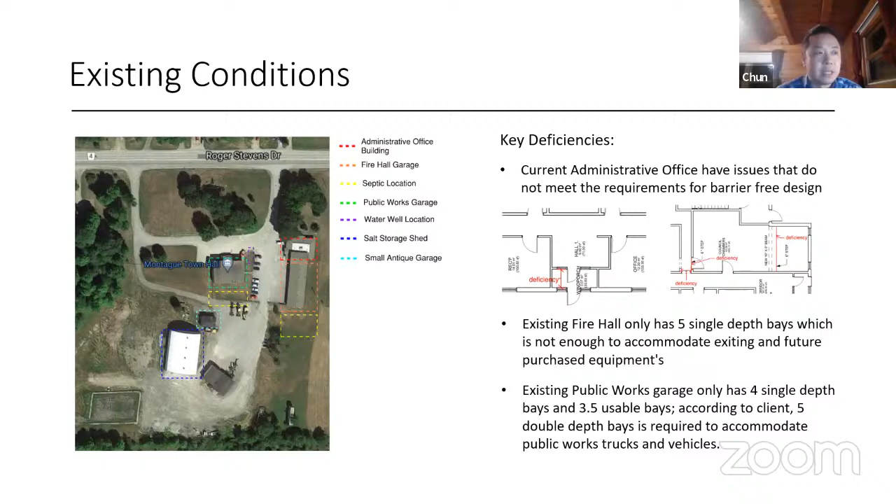Other than accessibility, the major task is programming for the future new building. We consulted with the township manager, Andrew, Stephen, and fire chief Emil. After an on-site review of the existing building and interviews with them, we learned what they need, their working conditions, their everyday life, and the number of staff currently working in the facility and in this office.

We picture the future building meeting their current use while also considering future expansion. So in our programming stage, we listed all the existing rooms and also the future expected spaces based on the actual need. And you can see that for each building we ended up with some increase in square footage. This is based on some of the existing rooms.

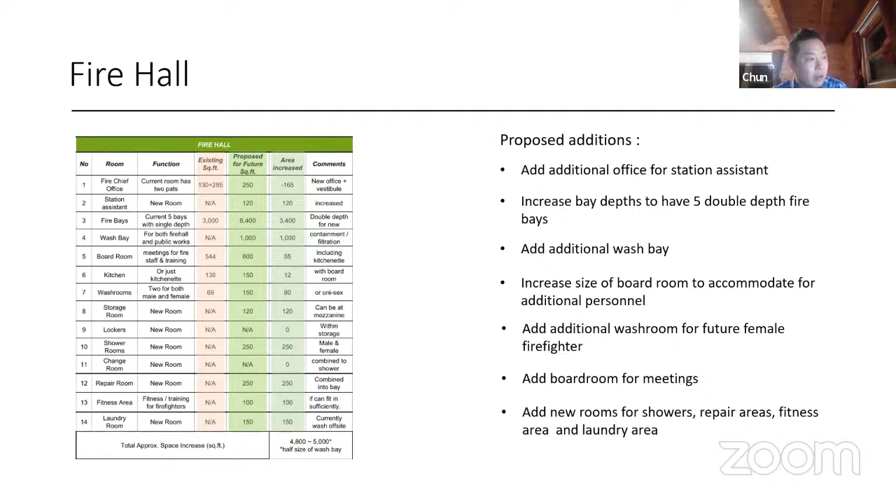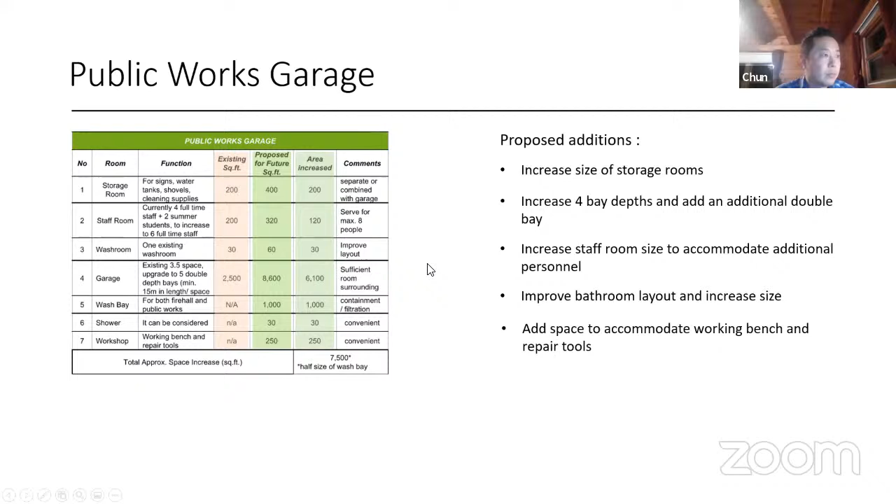For the public garage, we followed a similar practice, considering the existing equipment and trucks and also future increases. We made the overall square footage first, and then based on all these room spaces and square footage, we started our concept design, which ended up as the concept plan you can see later.

This one is the future admin office, which occupies the existing admin office plus the existing fire hall space. We also left the second level of the existing office, right now used as the fire hall board room, for future development or storage space, because the nature of the admin office requires it to be fully accessible and barrier-free.

On the ground level, we have enough space for future needs, and you can see there are also 2 fire truck bays on the south end of the building we left for future development. This means the existing and near-future use, based on the information the staff provided us, is already met using the rest of the space.

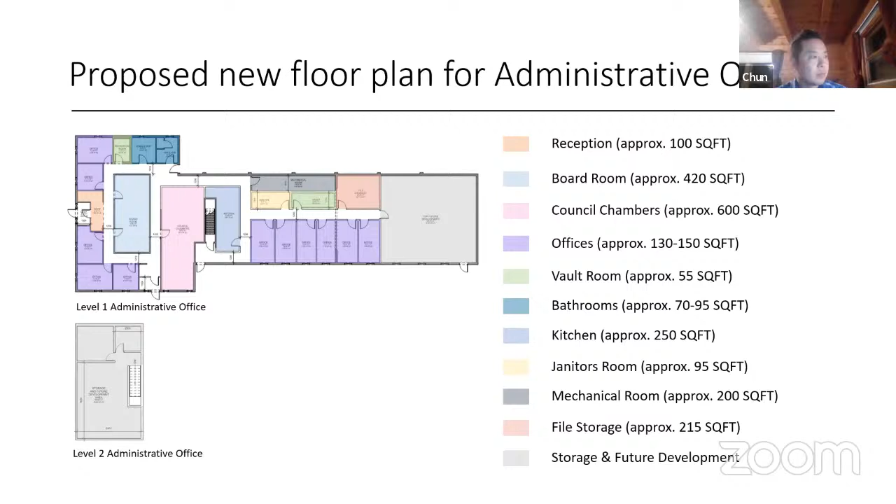For the proposed public garage and fire hall, we integrated them together into one building. That's also considering the nature of these 2 buildings. Lots of servicing space can be shared, like a shower and changing room, for example.

For the parking spots, we exactly followed the actual need for the existing truck number, and also the potential to buy more equipment in the future. So we followed the data directed by the public works manager, and we designed this section of the building to serve the public garage.

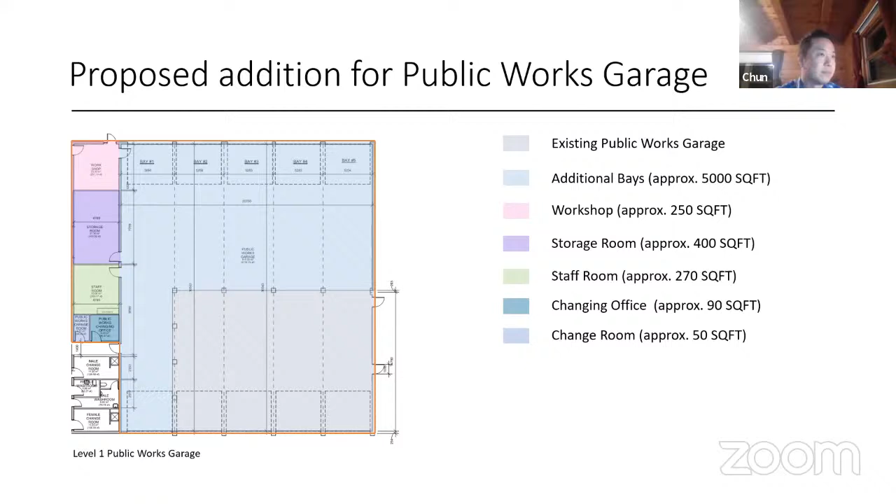Same thing for the fire hall, and you can see there is a certain amount of the space we actually can share with both sides, and there is an entry and the corridor connecting both sides to share certain of the functional space.

The 5 double-depth parking bays also consider the existing trucks, and in the near future you may potentially buy some more trucks, and more of the equipment can be stored and parked inside the garage. And at the west end of the building, there is a washing bay that can be shared by both the fire hall and the public garage to wash the trucks properly.

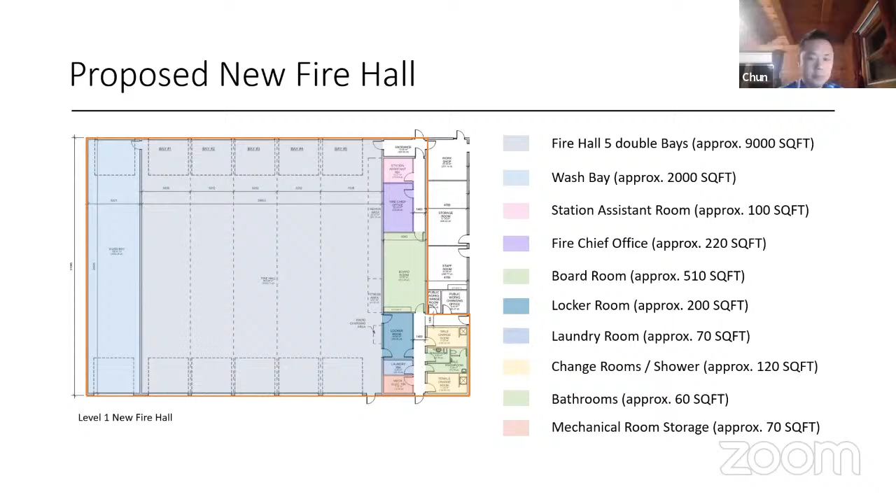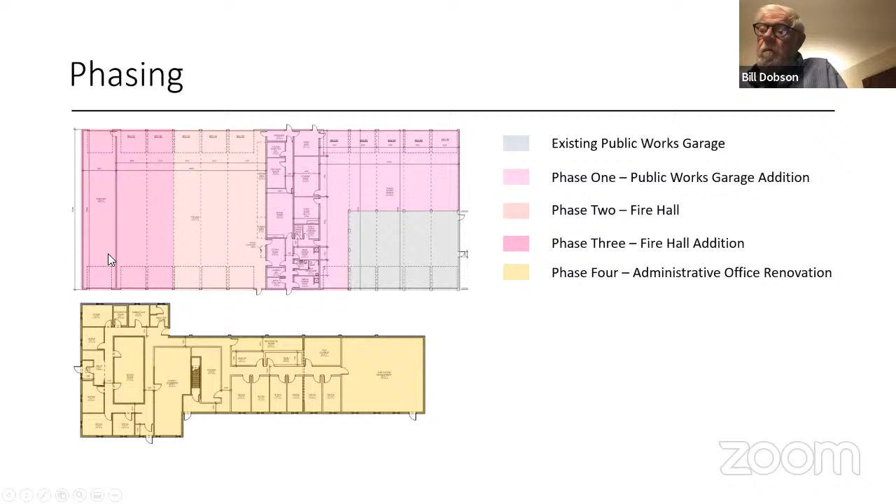Yeah, and considering the size of the building, we sort of threw out the idea, especially for the larger building, that this can be phased during the construction. That really depends on the funding, right? And also considering the timing of the construction. The good thing is during the construction of this new building, the existing admin office and existing fire hall can still be used, right? And even the existing public garage can still be used if we phase this construction properly.

And also depending on the funds, we can, for example, at the very west end, the parking, the washing bay, and also the additional parking bay, if based on the actual funding, we can reduce the number of bays, right? To provide the flexibility either for the final building, or provide the flexibility for the actual construction timing and the phase.

And after the new building is finalized and the new fire hall is put into use, the existing admin office and fire hall can be converted to the future admin office. That means if we plan well, either for the construction phase or for the timing and the funding, our plan leaves the township full flexibility to eventually make a decision based on the funding and the timing. And that can be further discussed.

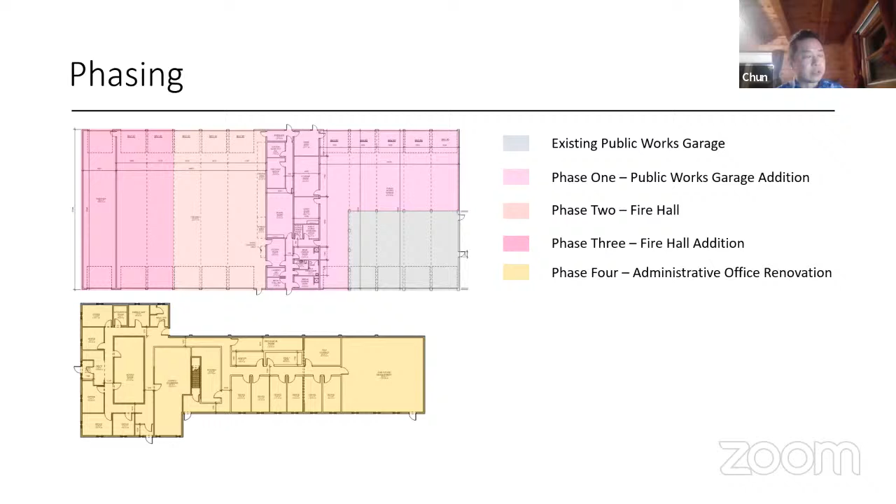Next I will pass to Devin to give a short brief on the energy modeling. I know the township is quite eager, especially for the existing admin office conversion, to try to get a 30% reduction in energy consumption for the future new renovation.

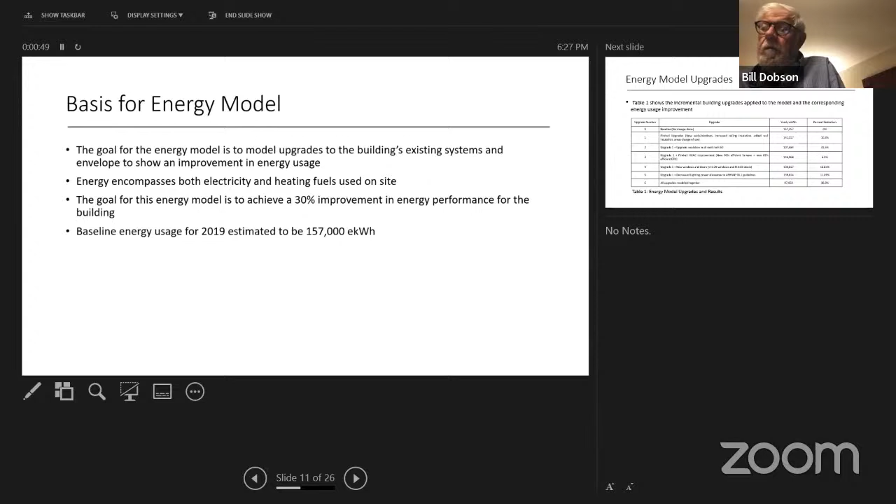Okay, do you want me to share my screen? Okay, sure, you can. You want to share from your stand? Yeah, I'm just getting to it here. We can see it now, Devin? Okay. You can see the full presentation screen. Okay. Yeah.

Thank you for having us tonight. My name's Devin Lake. I'm with Greer Galloway Consulting Engineers in Kingston. I'm the project manager for the engineering on this project, and I'm a mechanical engineer by trade. So I'm going to speak to all the work we did, which was energy modeling, mechanical, electrical, and structural recommendations

and design recommendations. So for energy modeling, we were tasked with trying to find ways to improve energy efficiency of the existing building after the renovations by 30% compared to its energy use today. We were provided utilities: electrical, propane, and oil. All three are used at the current facility. And we used those numbers to come up with baseline energy use based on known construction and some assumptions: insulation values, window values, and the existing HVAC equipment efficiencies.

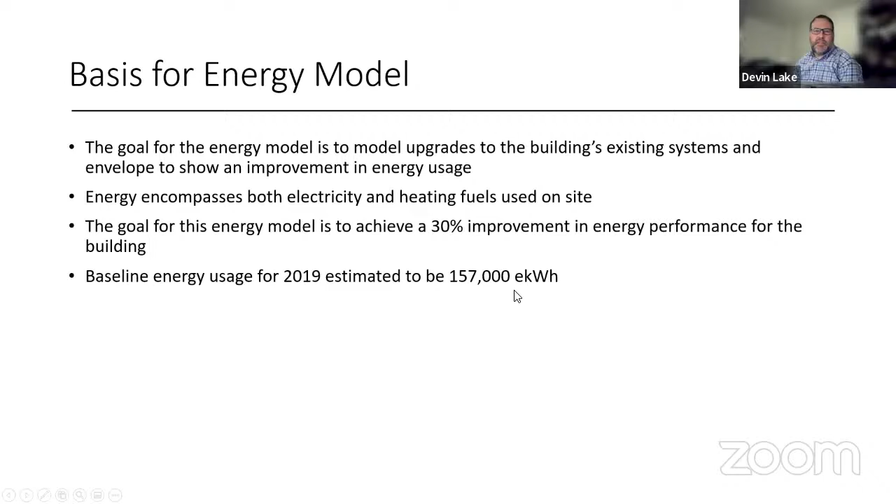So we started with the baseline energy usage in 2019 of 157,000 equivalent kilowatt hours. That's the combination; we just convert propane and oil to kilowatt hours so that we can make a baseline comparison. And we didn't look at all the possible energy efficiency upgrades that the building could receive. We had no issue getting to 30%. We could certainly explore more, and I will discuss that as we go through the HVAC options.

So you'll see in the first row of the table that upgrade 0 is nothing. That's the baseline, where we're at today, as of the 2019 numbers. The first upgrade is simply what Sean has already talked about in terms of new walls, infilling existing bay doors in what is now the fire hall, increasing some ceiling insulation, increasing some wall insulation. Those improvements alone represent a 10.3% reduction in energy.

The second upgrade we looked at was just increasing the insulation in all roofs to R60. They're truss roof systems, so there's lots of attic space there to add blow-in cellulose insulation. So you can see right here we're getting 31.5%. So between the two minor changes to the building envelope, we're seeing over the 30% that we were looking for. So it points to how old the building is, and how limited the insulation is compared to what we do today.

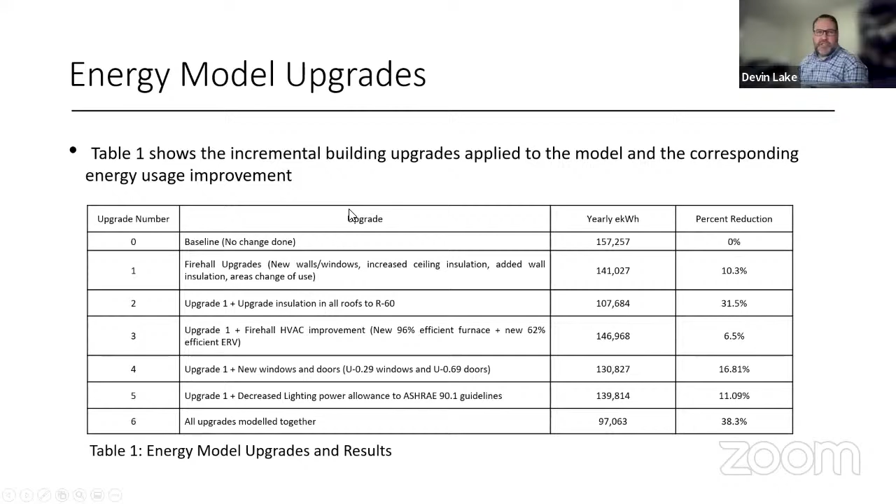And then in terms of the new building, we were just asked to comply with the current energy standards. So there was no energy model done to demonstrate what that would be. It would be just to building code. And so here's just a chart of how the energy usage is over the season. Obviously we're a heating dominated climate, so you see a higher energy usage in the heating time of year, and then it decreases in the summer months. The insulation values make the biggest improvements on the extremes during the colder weather.

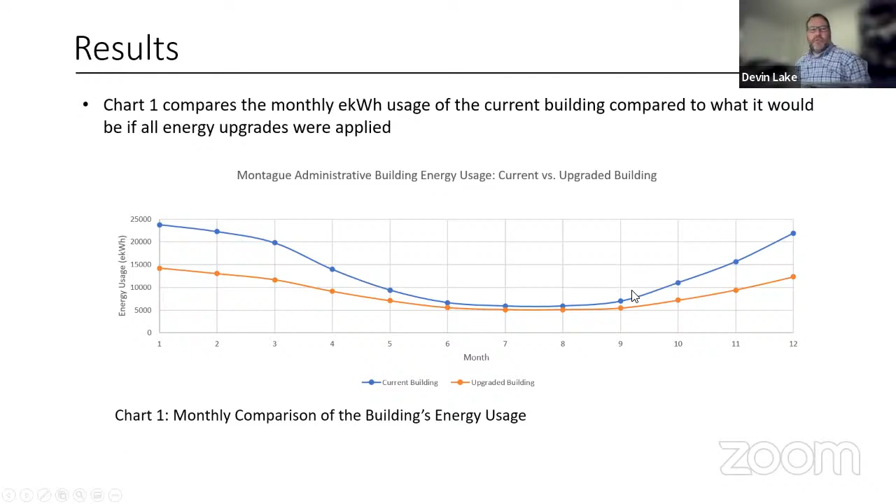Electrically, our electrical engineer reviewed the site. We'll start with some existing deficiencies that will have to be corrected. On the incoming service, there was a missing splice cap on the line, which could cause shorts. Panel A2, this is the existing building. Panel A2 is protected by a 200 amp breaker, but the panel itself is only rated for 125 amps. The next slide talks about recommendations.

The generator manual transfer switch has been damaged by a fire truck. So it's possible that other electrical equipment could be damaged in the same manner. So those things would need to be rectified. Electrical bonding for the main distribution relies on metallic conduits and enclosures. This is code compliant, but not best practice. So I'm going to switch to the next slide and stay on the administrative business building.

So it's required to fix that splice because it is a safety issue. For the panel that is only 125 amp rated, but protected by a 200 amp circuit, it needs to either have a new 125 amp overcurrent protection device to protect it, or you could alternatively switch it out with a new 200 amp panel.

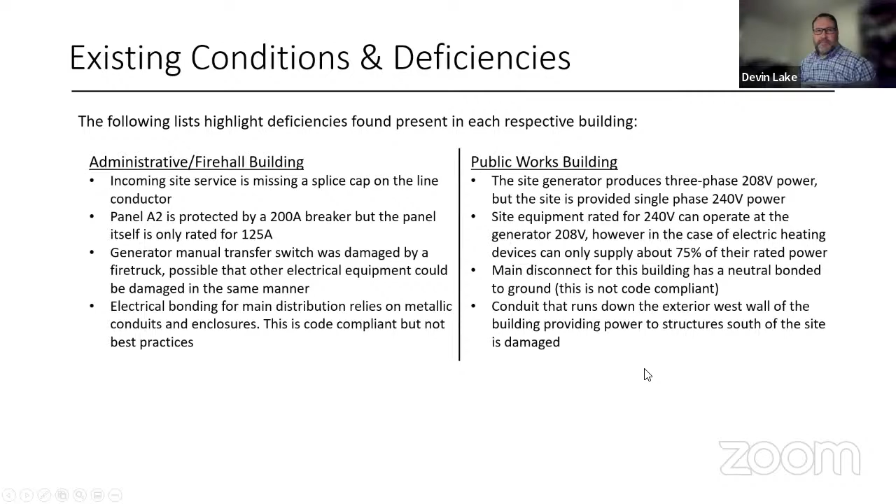The main disconnect for this building has a neutral bonded to ground. This is not code compliant. And the conduit that runs down the exterior west wall of the building, providing power to structures south of the site, has been damaged. So requirements to fix some of these deficiencies are, again, perform a load calculation of the entire site to determine if a site service increase is necessary. This would also be to support the construction of the new Public Works and Fire Hall building.

Upgrade the current emergency generator with a new propane one paired with an automatic transfer switch. So right now it's a manual transfer switch, so somebody has to be there at a power outage and go flip the switch. We're recommending an automatic one. Recommending to upgrade the generator because of the one issue I already mentioned, that it produces three-phase and only one phase is being used at 208 volts rather than 240 volts that the building uses and what your current service is.

And also the age of the generator is quite old. And it's also diesel, so propane is a little bit cleaner fuel than the diesel. Not that it should be running very often to have much of an effect on your greenhouse gas emission.

The third point is to ensure that the building can operate on current electrical infrastructure until the new mechanical electrical room is constructed. This relates to the phased construction. The new electrical room is located in another phase than the first phase. So that's in phase 2, I believe. So that will be something to consider. It is suggested that any equipment involved with the site service entrance not be relocated. Sorry, I went back a line.

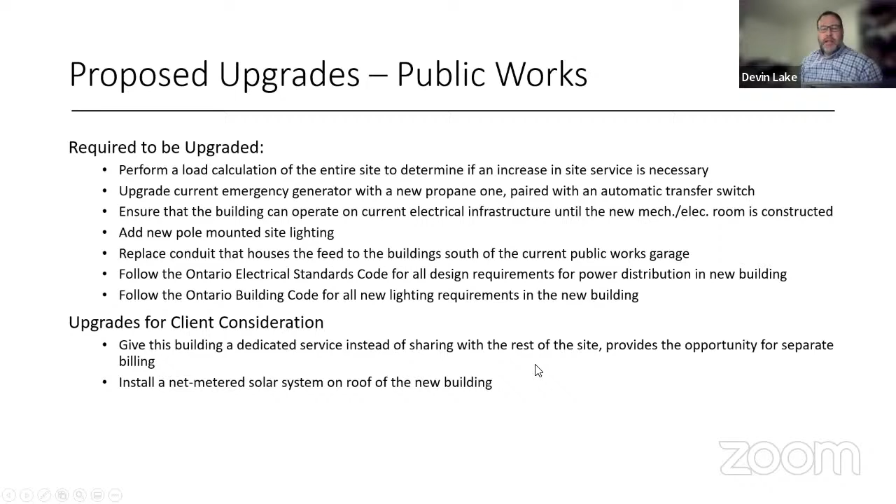Upgrades for the client to consider: give this building its own dedicated service, instead of sharing with the rest of the site. Right now, the service comes into the one building and is shared among the two and other outbuildings. So this would provide the opportunity to separate billing. And you could also consider installing a net metered solar system on the roof of the new building to meet some of your energy efficiency goals.

Any questions on the electrical before I move on to the mechanical? If someone wants to ask a question, they'll have to just speak up, because I can't see the screen. I can't see everyone. Unless you want to just flip back to the screen there so we can see everyone. But do I hear any questions? Okay, I think you can go on then, Devin, to the mechanical.

Okay. So mechanical, laid out the same way. We're going to talk about the deficiencies in the administrative fire hall building. The existing HRV's fresh air intake was found to be completely blocked. So obviously this creates, in the age of COVID, a concern that you're not getting any fresh air into the building and not getting ventilation to help the air exchanges and indoor air quality.

The fire hall furnace has been damaged and is not operating. The fire hall furnace was found to be outdated and not high efficiency. The building suffers from low water pressure during heavy times of use. And then the public works building, exhaust ventilation to control vehicle emissions was not operating. It was a safety issue. People breathing in the carbon monoxide and the NOx emissions and other VOCs.

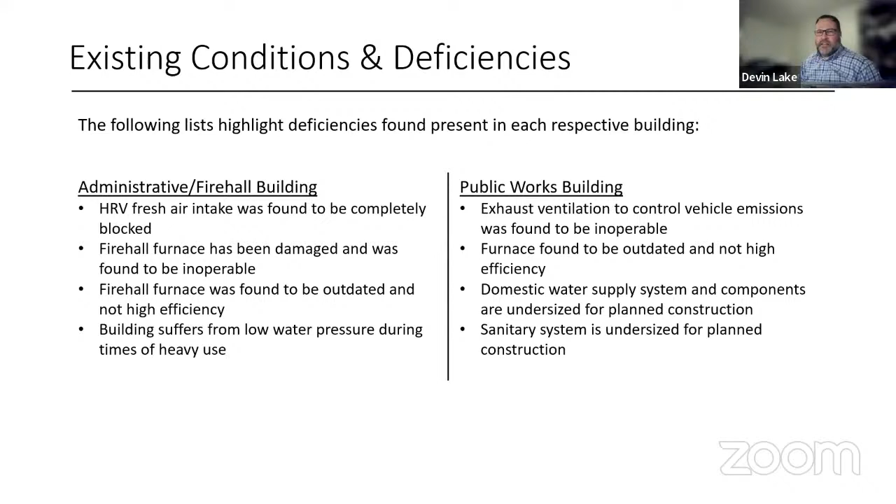So the furnace was found to be outdated and not high efficiency. The domestic water supply system and components are undersized for planned construction, and the sanitary system is undersized for planned construction. So in terms of the existing building and the renovations that IBI has presented, we've looked at the building and thought it makes sense to kind of consider it in 3 zones.

Zone 1 is the administrative area, less the council chambers and a meeting room and the upstairs. We separated out Zone 2, those specific areas, because their current systems aren't necessarily adequate for the increased occupant load that those spaces will have. So you need more ventilation air than what can be provided now. That's one reason. The second reason is that they can have very different loads than the rest of the building. Council chambers can be heavily loaded at times and then largely unoccupied. Same with meeting rooms. They're often heavily occupied and then not occupied. So it's nice for them to have their own system.

And so for Zone 1, the administrative area, the recommendation is not to change anything other than some minor duct modifications for any layout changes. That recommendation is because the equipment is currently of a higher efficiency. It's not that old, so it's not really scheduled for replacement. And the other options we looked at, such as either new systems or relocating it into one of the new mechanical rooms, would require extensive duct modifications, whereas by retaining it, you can essentially keep everything. So it's a low capital cost with not much upside to moving the equipment other than freeing up some space where it is now.

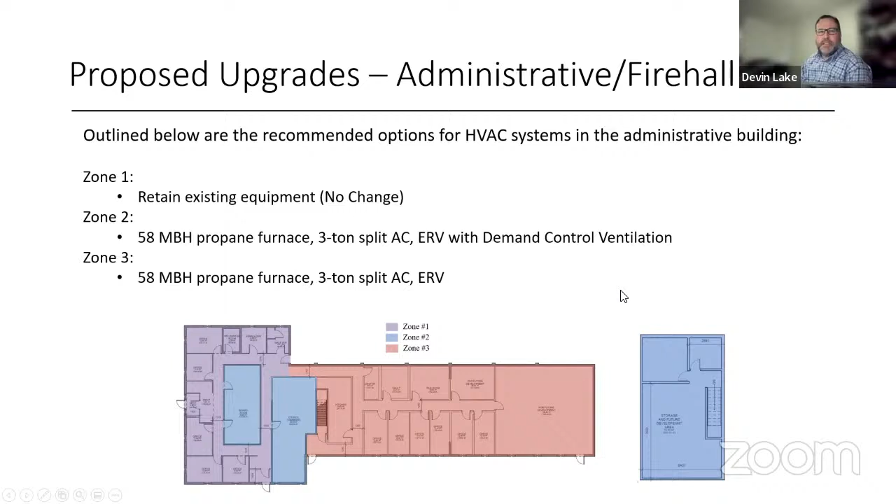For the public works garage, again, we've separated into zones both to reflect different uses, but also to reflect the phasing that Chun presented. Starting in zone 1, starting on the left is a vehicle wash bay. And then zone 2 is, is that the public works? No, that's the fire hall bays.

So in general, and then I will also talk at the same time about zone 5, which is the vehicle bays. So in general, vehicle bays have doors opening and closing frequently, which means any cooled air or heated air escapes every time the door is open. So it's expensive and energy intensive to heat the air. So systems better suited to that use are radiant systems, which is a surface to surface type heat. You don't necessarily heat the air, you're heating the surfaces.

So for those areas, zones 1, 2, and 5, we reviewed or analyzed in-floor radiant heat and propane radiant tube heaters. And our recommendation for those 3 zones, similar uses, are all propane radiant tube heaters. This is, they both have their pros and cons.

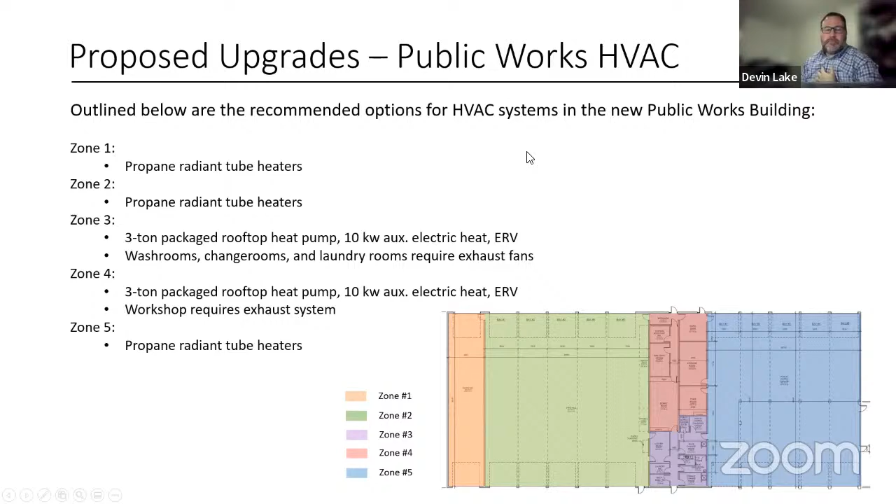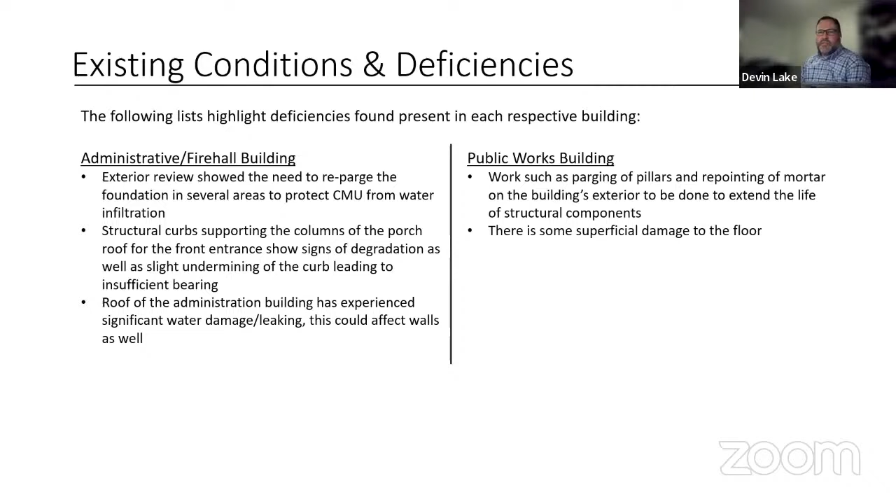So the proposed upgrades with the renovation of the administration and fire hall is to reparge the walls and foundation where required, address porch columns by introducing non-shrink grout between the curbs until such a time that they can be removed and replaced with new cast-in-place curbs. Follow through with the already planned roof replacement of the administrative building, and retain a structural engineer for any new planned windows or doors in the existing CMU walls.

The construction of the administrative and fire hall building: in the fire hall, the exterior walls are concrete block walls, whereas as you move into the administrative area, they are lumber walls.

So proposed upgrades for the public works. The proposed new fire hall and public works garage building can be designed with conventional or pre-engineered steel framing for the superstructure, and conventional pad and pier foundation would be the foundation. Of course, this is all pending a geotechnical investigation once the project progresses to design level.

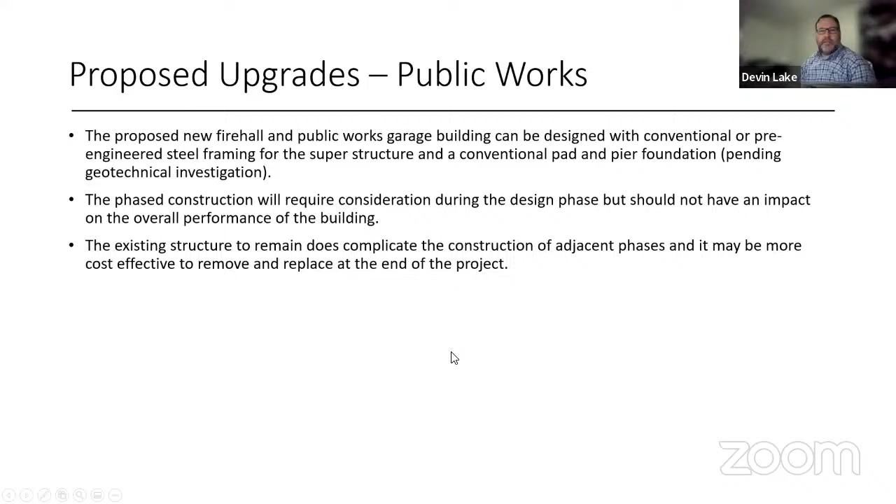And then cost, Chun, do you want to jump back in on the cost? Sure. I will talk a little bit about the cost. After a conversation with the township manager, we went back to the cost consultant to refine the estimate a little bit more, because the construction will not take place immediately, considering the timing, maybe in the next 1 or 2 years to gradually do this job. So considering all these factors, the cost consultant bumped up the overall numbers a little bit, to give a better vision of the overall construction cost.

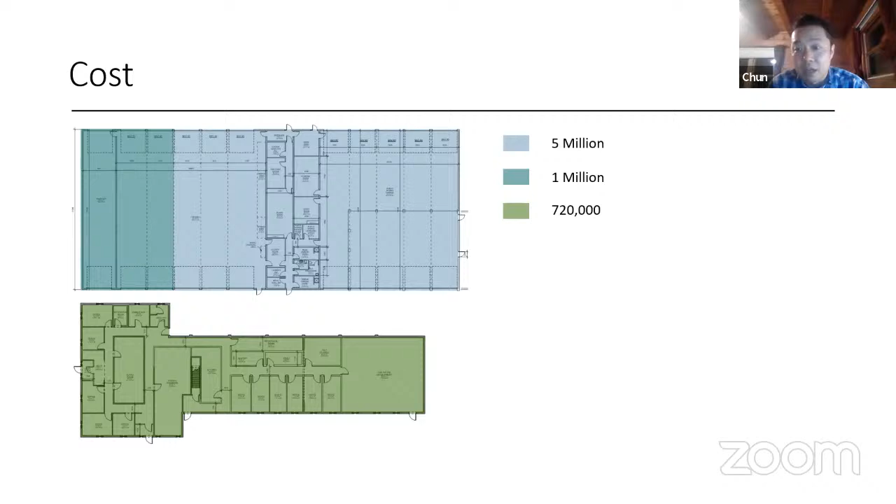So at this time, if you still upgrade from an 80% efficiency furnace to a 90% efficiency furnace, you won't see that much reduction of energy consumption anymore, because the house condition improved a lot and your furnace won't run that much. Compared to before, at 20 hours, no matter which furnace you use, it needs to run 20 hours to provide heat for your room, and if you increase from 80% to 90% efficiency, you will see an immediate reduction of energy consumption. But for your very well insulated house, you won't see that much anymore.

So that's why every strategy being combined won't add up. You will see about 38%. But also, I want to add this.

Some of the improvement, or say changes, is inevitable, right? Like we pointed out, some doors are too narrow, not accessible, right? You will need to change them anyway, so you can't avoid changing them. So once you change them, of course, improve the U value and put a better performance door there, right?

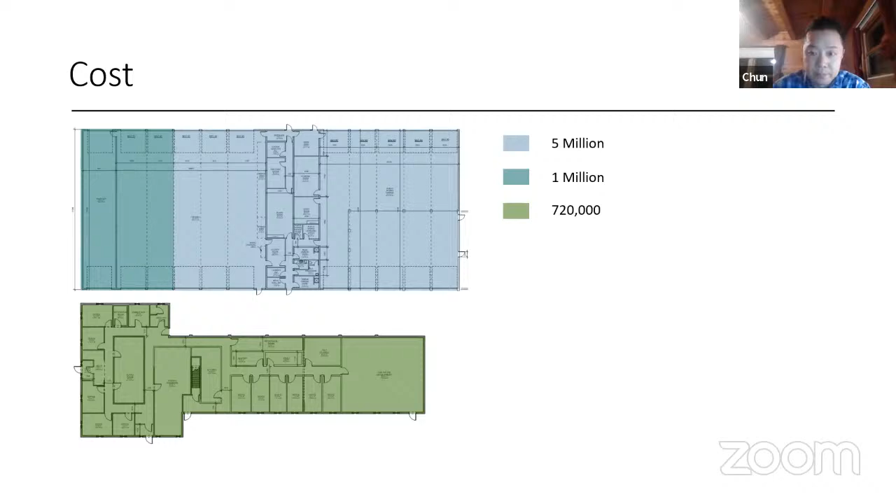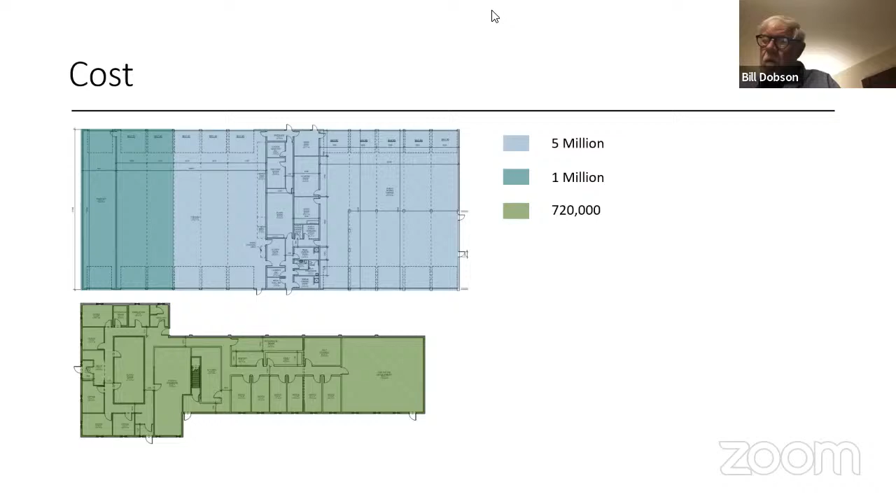So I think, Chun, if we can maybe go back to our other screen without the report, and then I'm going to open it up for some questions. Thank you. Okay, first off is Claus, and then Ian.

Thank you, Reeve and Chun and Devin. Thanks very much for your report. It's amazing reading, I can tell you that. It's very interesting. I just have a quick question, and then I'll let someone else ask because I do have several. Chun, I'm just wondering, the council chambers, you're only increasing it by 50 square feet. Is there a particular reason why, or is it you can't do more than 50?

Yeah, we definitely can increase more, but all these numbers are just based on the requirements after interviewing the township staff. That's the minimum increase, right? To meet their current goal. So in the end, with the future conversion of the fire hall, there's still additional space that can be used, right? So if we want to increase some of the functional space sizes, there is still a possibility.

But what I'm saying is, that chart was after consulting with the township manager and the staff; we got those numbers. So based on those numbers, we increase. That's just the minimum we have to do to meet our township requirement, right? And of course, if we have the opportunity or the extra space, definitely we can increase more. Okay, thank you. Ian?

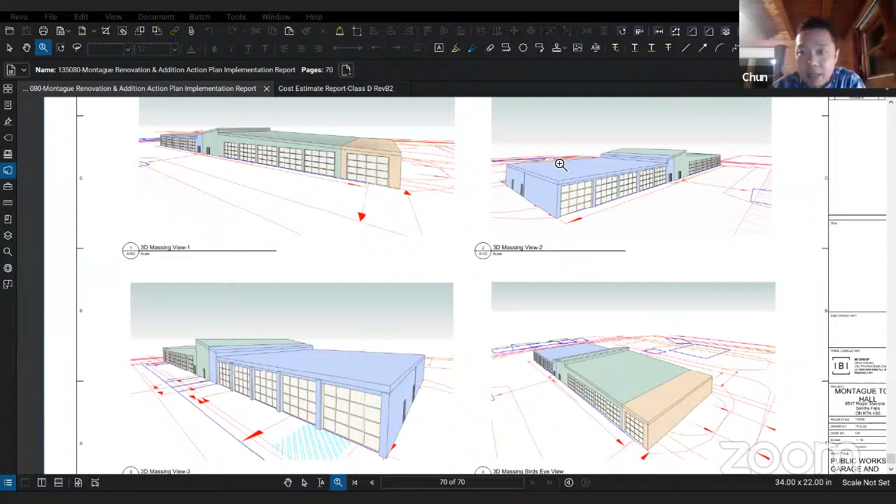Yeah, that's just currently a preliminary concept. We thought that is the most cost efficient solution, right? And you see the concept from our 3-dimension view, I can share that. In the middle of the building, we did design a higher, like a 2-story level, right? And that part is not flat, and we can anticipate that part to be extended to use a second level even, for this middle part.

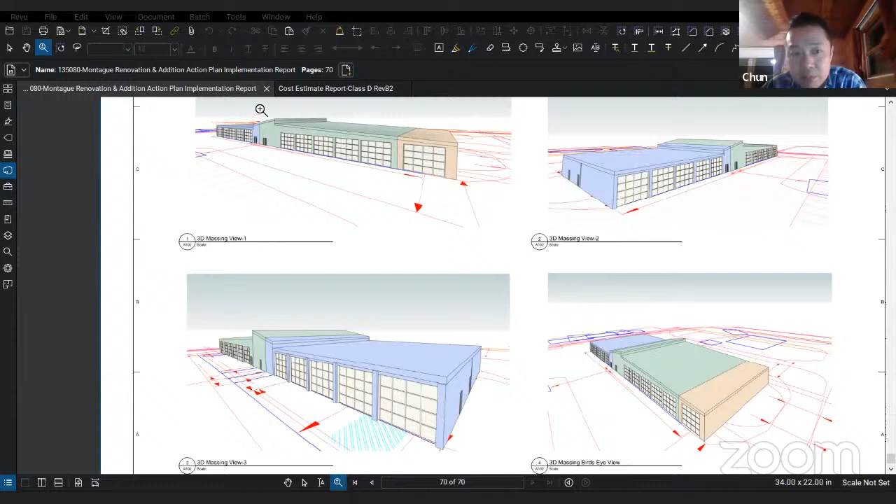We on purpose designed it a little bit higher. One thing is to break the long stripe of this boring building and make it more fun. And also, after the interview and conversation with the township staff and the manager, we want to leave the opportunity to add the second level in the future. After certain years, with expansion of the staff and more equipment, at least the second level can be used either as storage or a future small office. Yeah.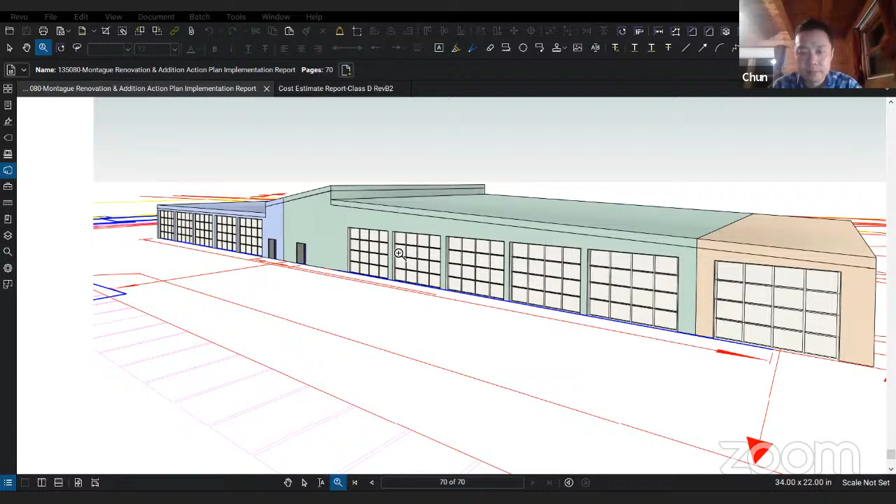Okay. Very good. It was interesting to see that. I guess there's more of the report that we could see as well, right? Yeah. Okay. Thank you. And once again, guys, thanks very much. This is a great beginning. So, yeah. Okay, thanks to everyone, Ben.

And I really think overall now that we've seen this report, as one of the many next steps, council has to continue putting their heads together and making sure which direction we really do want to go, because it's been pointed out tonight and through this report that there's quite a few things wrong with many parts of the buildings. So we have to continue thinking about that, whether we're renovating or going brand new.

I know we flip-flopped back and forth. We've spent a lot of time and energy and thought on that, but I think we still have to continue doing that. And I think it would be nice to see an overall cost of brand new as opposed to what we're talking about. I'm just throwing that out as part of next steps.